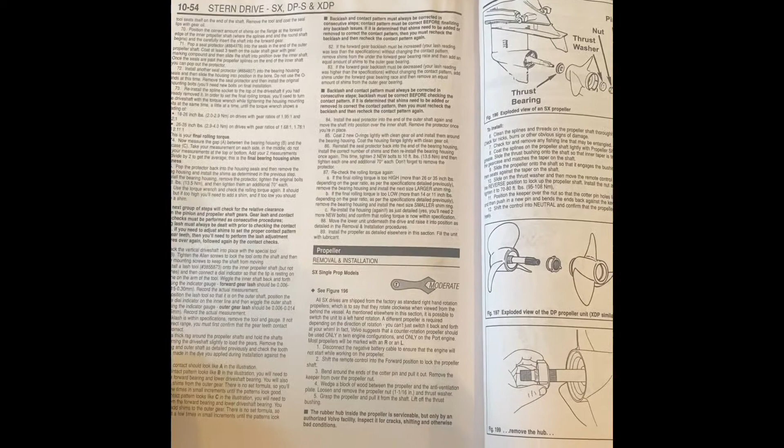I wanted to make this video to help anybody that has to replace their propeller on a Volvo Penta SX stern drive. Some key things I wanted to go over were tightening torque and the tools you'll need.

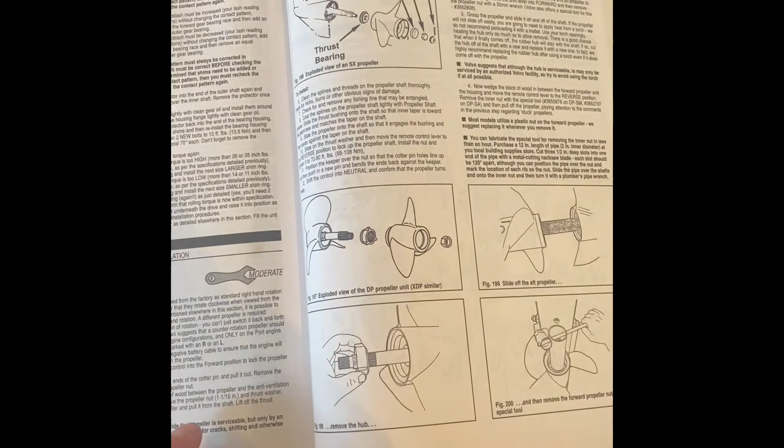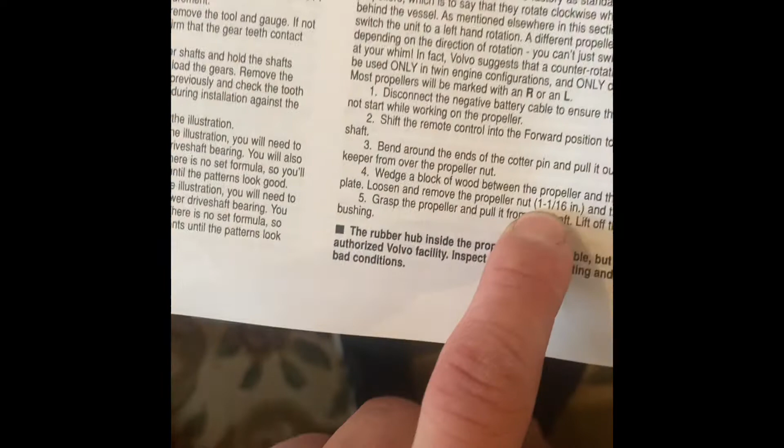You'll need a block of wood, a 1-1/16 socket, and a torque wrench. You'll need to torque it to 70 to 80 foot-pounds.

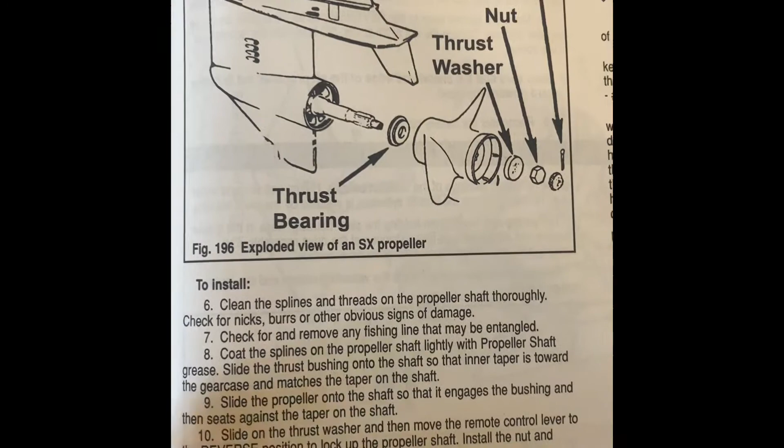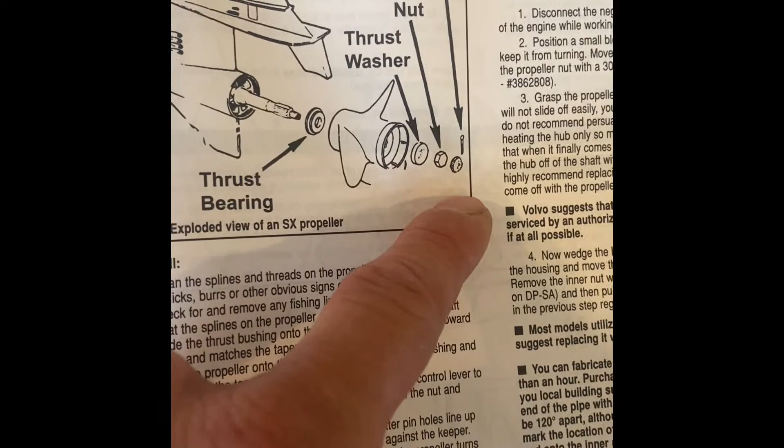This is the diagram of how it comes off and how it goes on. You see the different components: your thrust bearing, your propeller, your thrust washer, your nut, this component that the cotter pin locks in, and the cotter pin goes through the shaft.

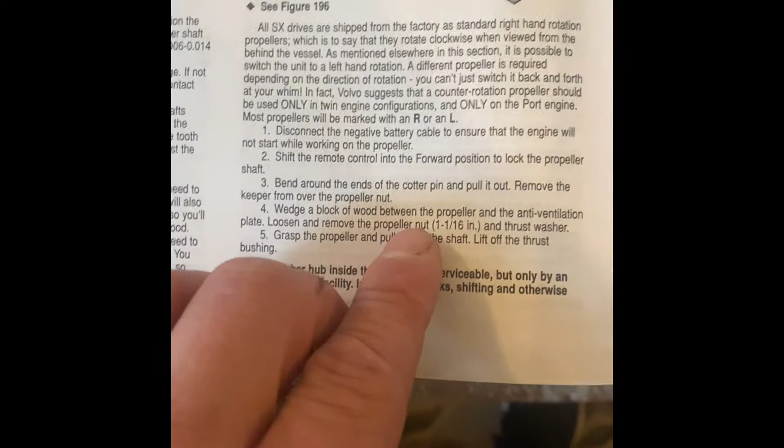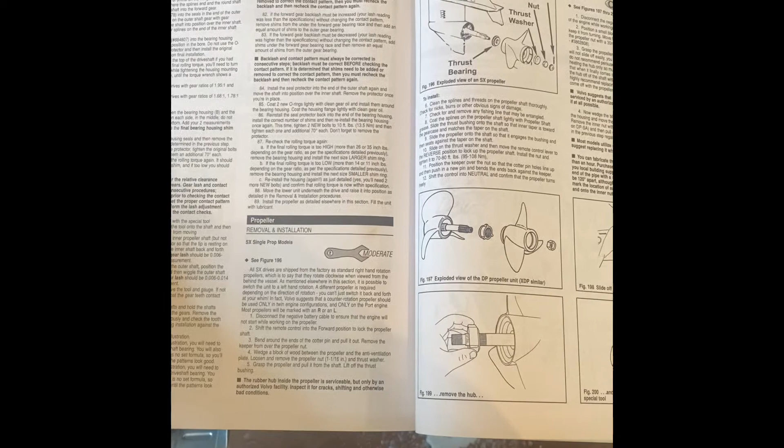Another thing to pay special attention to is you're going to need a block of wood, and you're going to need to put the boat in forward and reverse during this process. I will get into more details and specifications on this repair.

First step to this job is to apply the methods of safety and remove the negative battery terminal so the engine doesn't have any possible way of starting.

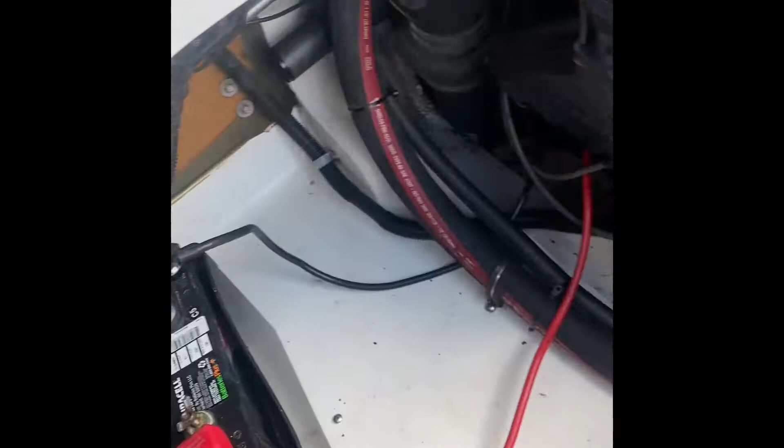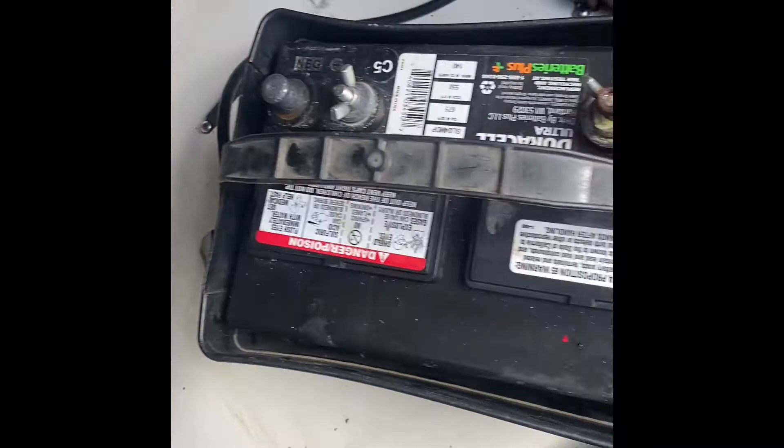Got my wrench here, I'm just going to remove it. As you can see, I have the negative terminal off the battery. Now we're safe to work on the propeller.

Sam Scheffler back here at the YouTube channel. As you can see, we did a little bit of damage out at the lake. Should have known better. I'm going to show you guys how to fix it.

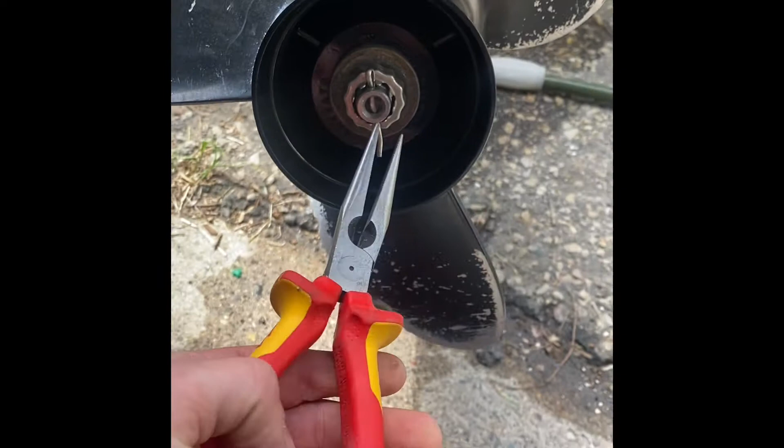First step is remove the cotter pin. Get your handy dandy needle nose pliers, bend the cotter pin straight, insert, and pull it out.

Once you have the cotter pin out, take this component - please, I couldn't find the name for this in the manual, if you guys know, please leave it in the comment section. Thank you. Next we have the nut.

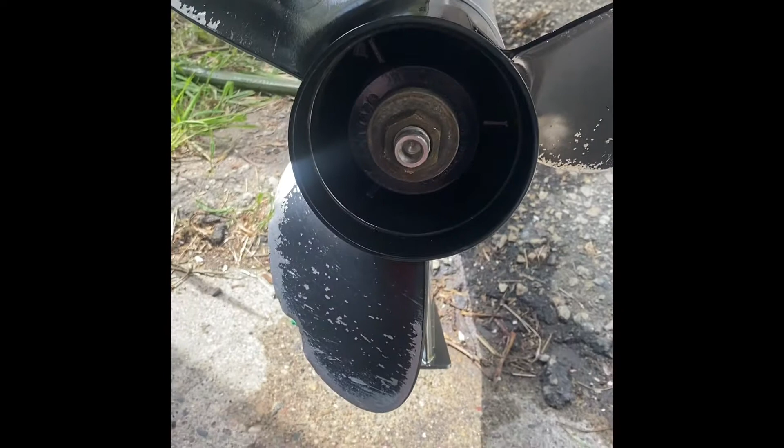So we're going to have to break that nut loose. I'll show you guys how to do that next.

Next step, shift the boat into forward.

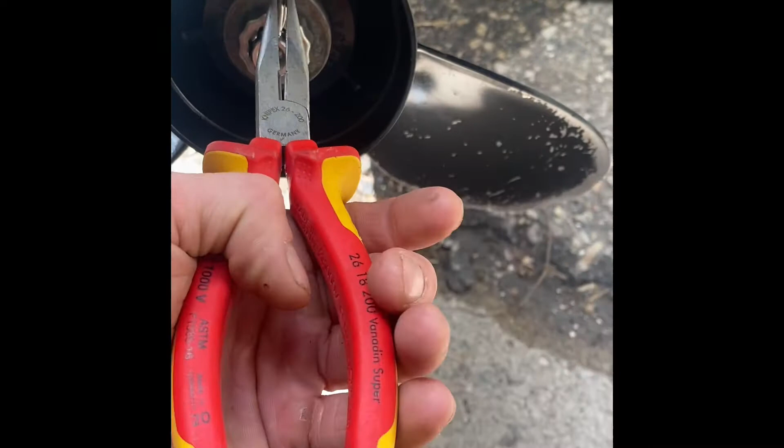Next step, remove the cotter pin and this cotter pin mechanism. If you know what this is, please leave it in the comments. Couldn't find it in the manual.

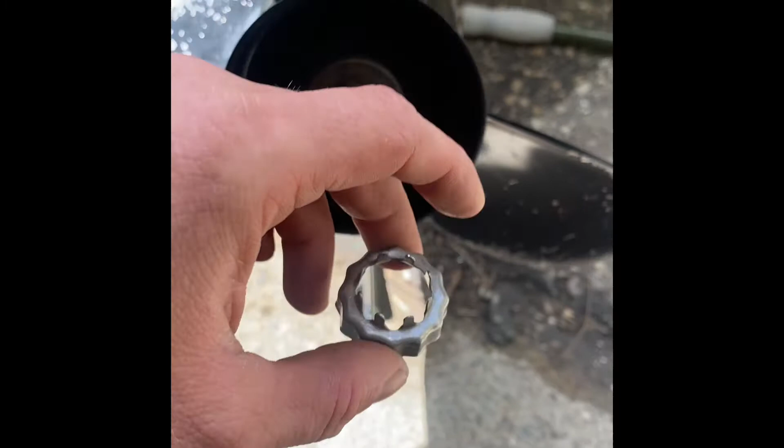The next step is to find a nice piece of wood that's soft, that won't damage anything, no nails in it, and wedge it in there. So we're going to loosen this up. I'll show you guys how.

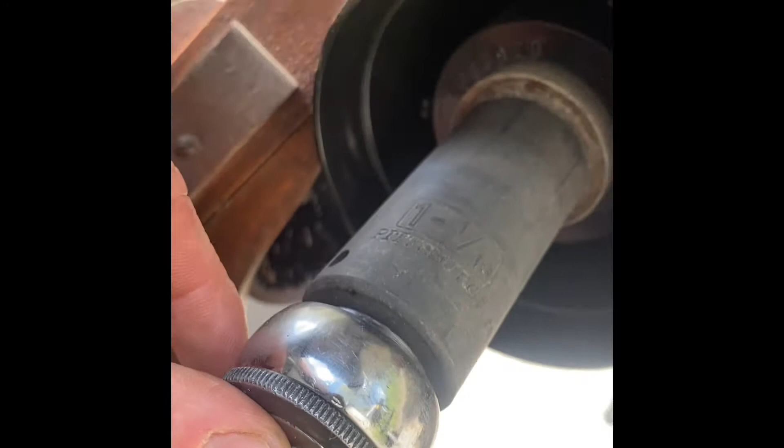Mine was super loose. It's a little alarming because I had it done at a professional marina. You need a 1-1/16 socket, just have a Harbor Freight one.

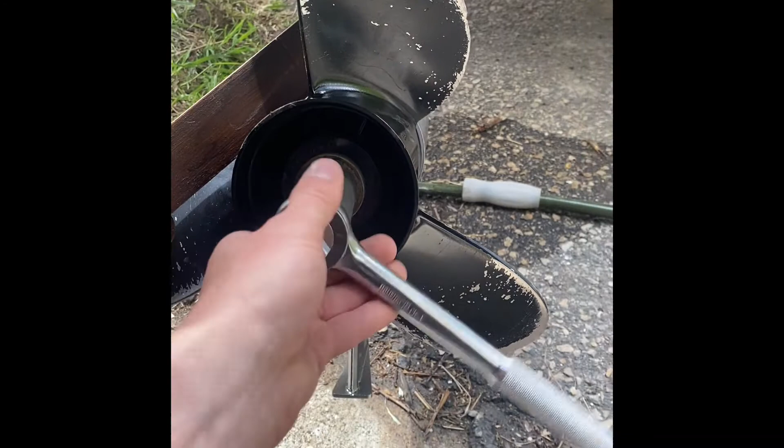That would wedge in there. I didn't even need to put that in there, it just came loose, which is not cool. So I'm going to pull this off and I'll show you guys the rest.

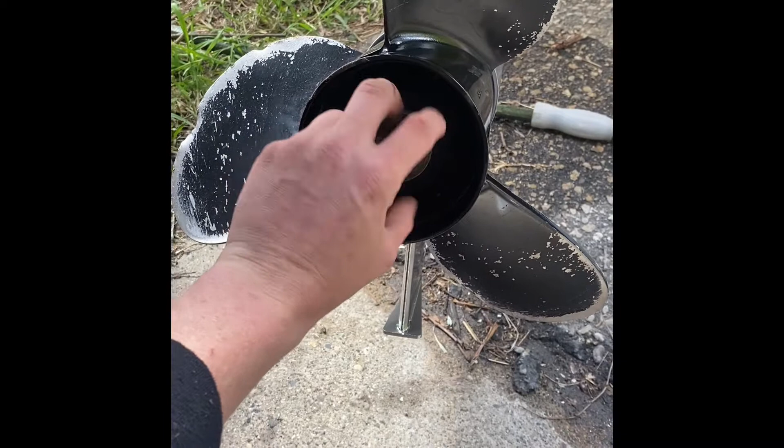I'm going to pull the nut off. Washer. Well, this is the propeller. It should just pull right off.

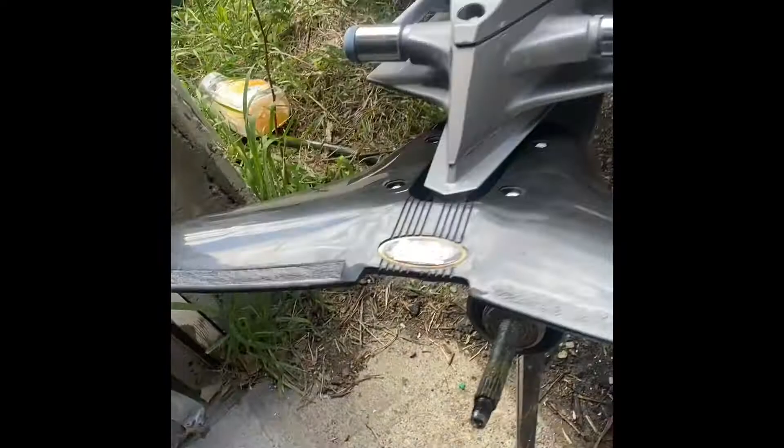And this is the thrust - oh, that's on there a little tight. The thrust bearing, as the manual says.

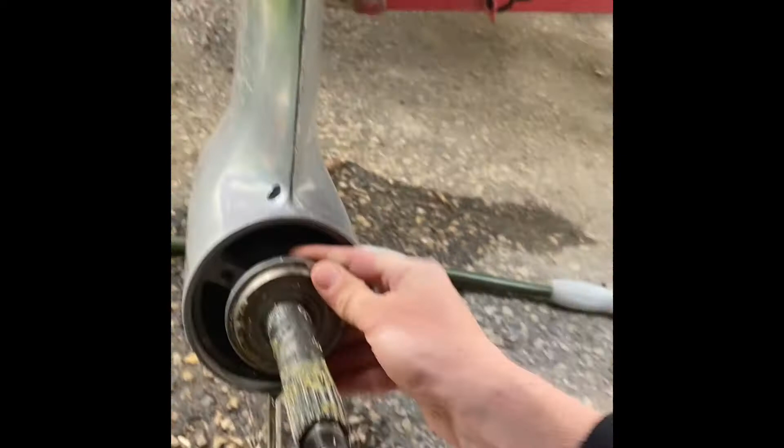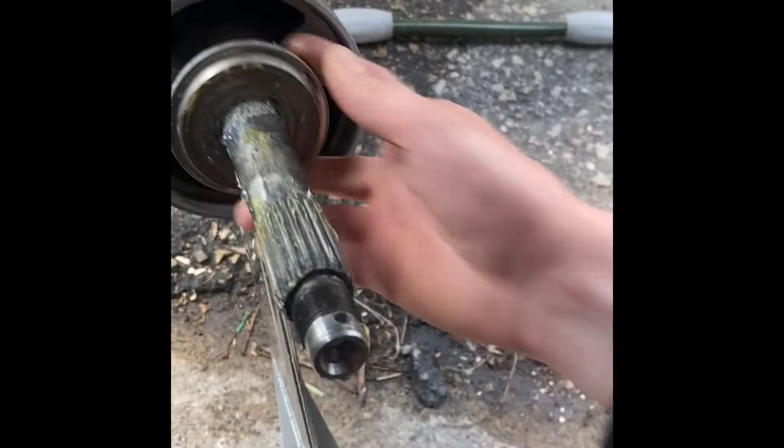I don't even know if I want to take this off, but they suggest to take this off to inspect the shaft. My shaft doesn't look too bad. I don't even know if it's worth it to get off there. I don't think I have to take it off for this exact propeller replacement, so I'm going to leave it on there, but you might need a puller of some sorts to get that off.

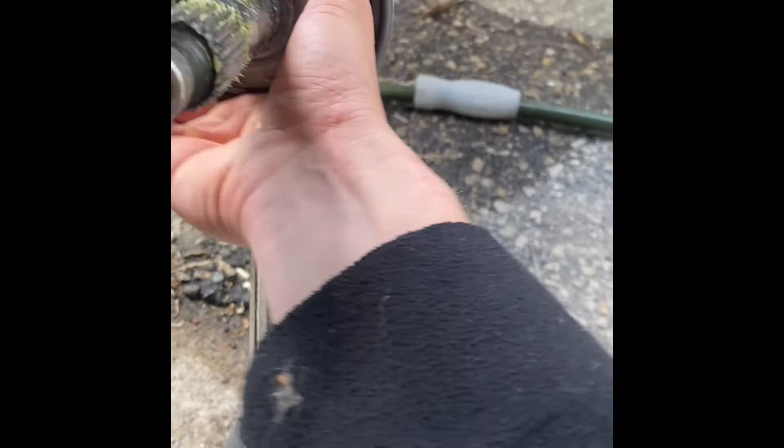Everything looks pretty aligned. My shaft doesn't look bent. You would need a dial indicator to truly tell if it's bent or not, but just visually inspecting it looks good.

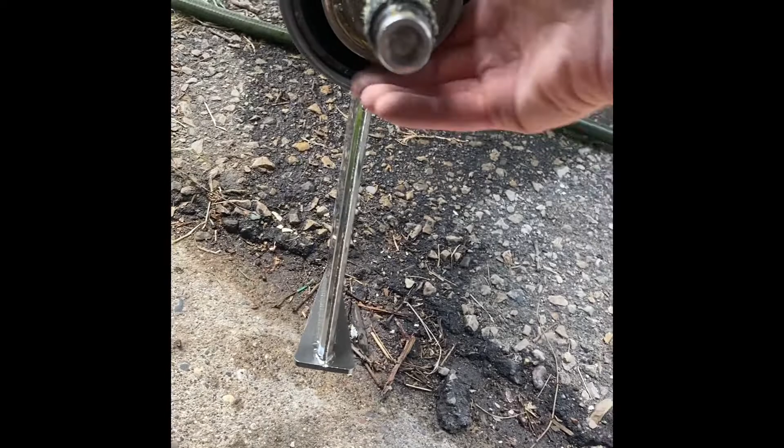So I'm gonna clean off this grease and reapply some Quicksilver high performance grease. That's what the local marina suggested, so I'm gonna use it.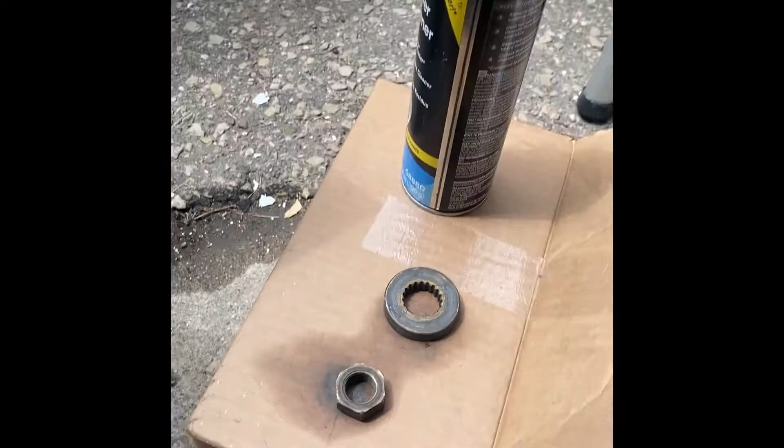All right, next step. I removed everything. I got everything cleaned up, all the old grease off of the shaft. Now I'm gonna be applying a light coating of grease and just smear that around. You don't have to have a ton, just a nice coating.

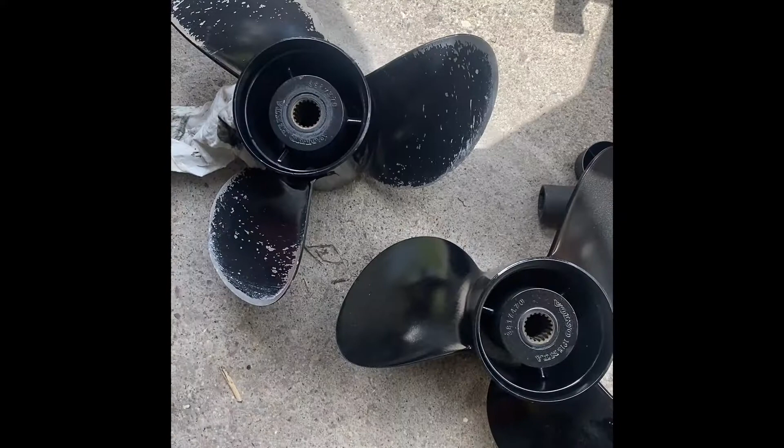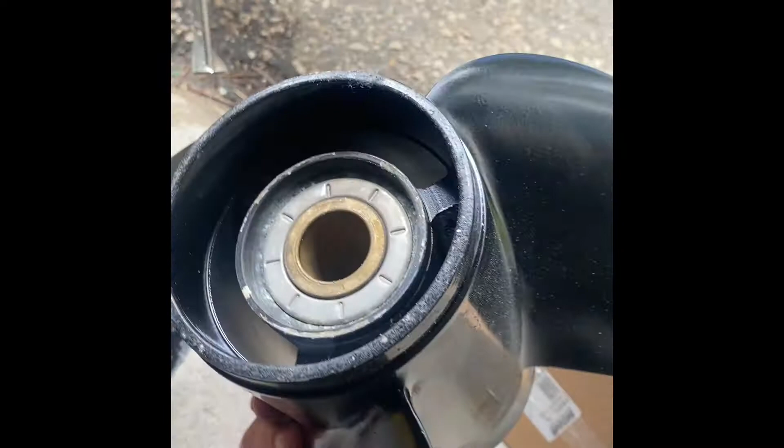Okay, now it's time to put the propeller on. Make sure to put the propeller on the same way you pulled it off. So I have the Volvo Penta facing me. As you can see on the back side, looks a little different. So we're just gonna go ahead and put this on. Slides in.

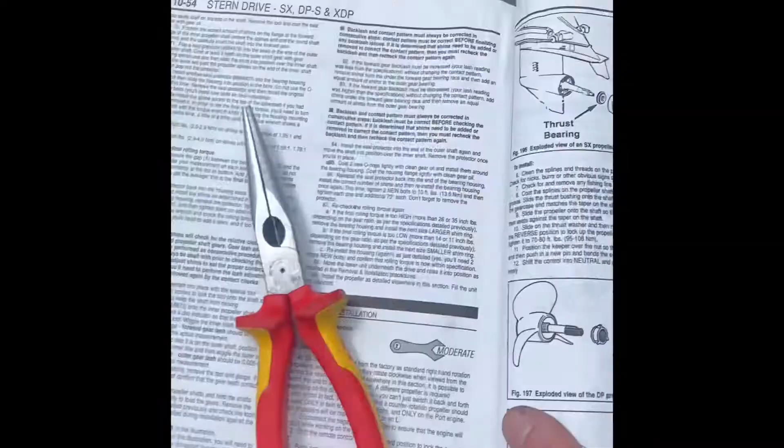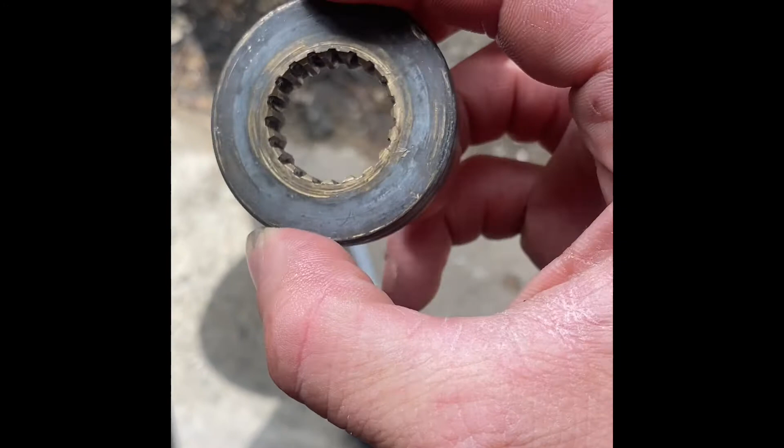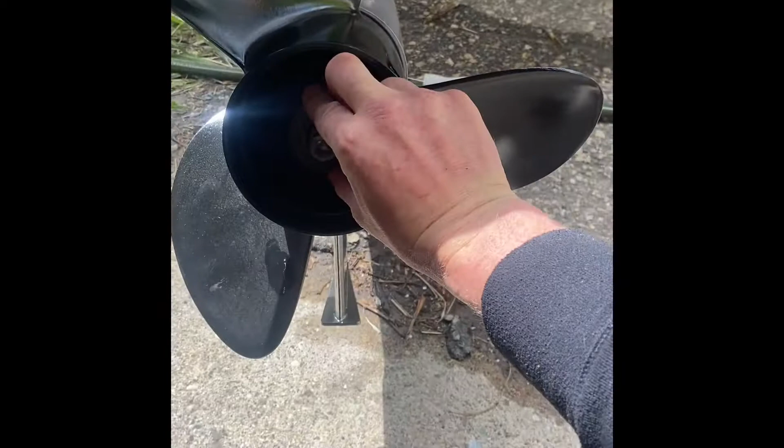Now next we're gonna put our thrust washer on and our nut. I'm not sure if this has an orientation. It looks to be identical, symmetrical. So thrust washer, make sure the splines get on there and it locks in. Nut.

Okay, now we're ready to torque, but we have to do one more thing before that. Next step, guys, we're going to put the boat in reverse.

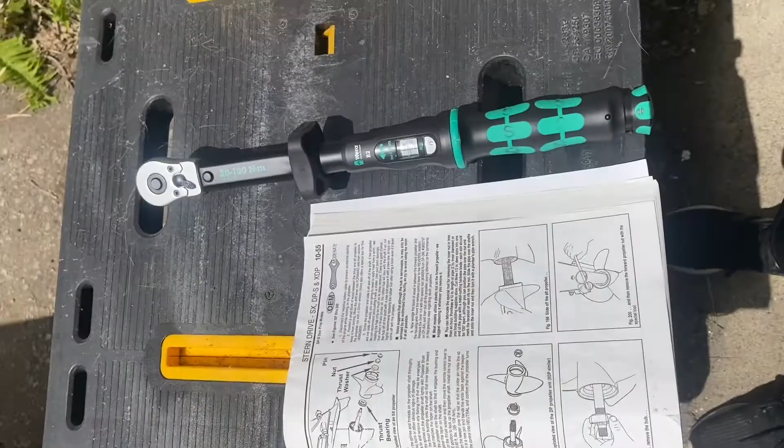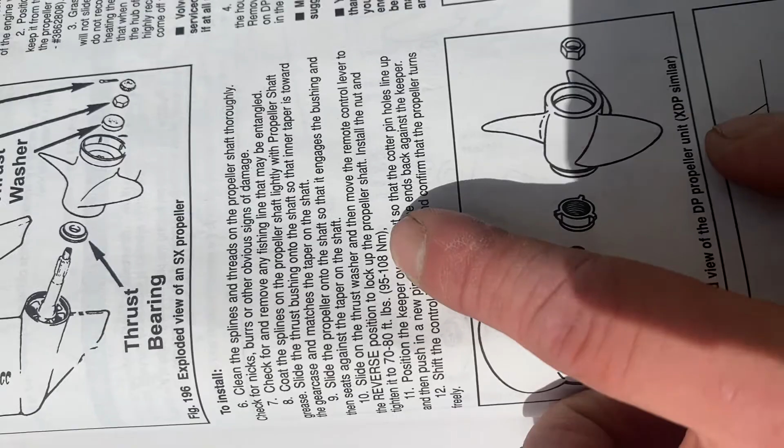All right, guys, now it's time to torque. Once I put the boat in reverse, the manual states to torque between 70 and 80 foot-pounds, or 95 and 108 newton meters. I have my torque wrench here. I really like Wera tools. Shout out to them. Be a tool rebel.

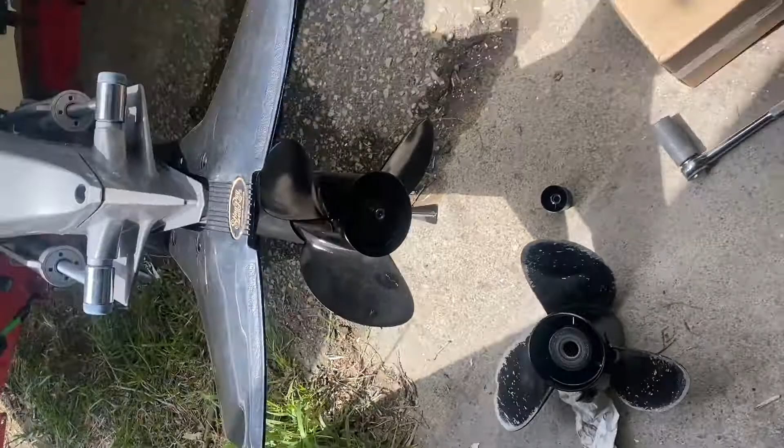And I have it set, as you can see, within that range. I always like to torque on the lower side of things, just to be careful. So I shouldn't have to put a block of wood in here as the manual states, so I'll change my socket out and torque, and I'll show you how I torque it.

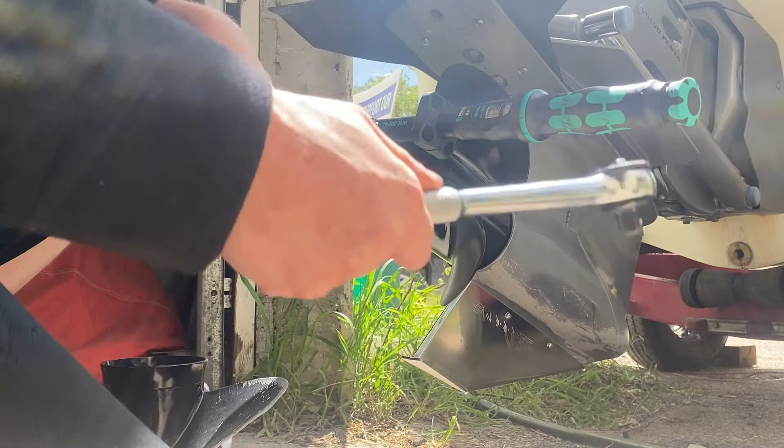All right, I got my torque wrench set up, set to the correct torque range. One thing I wanted to mention, you never want to break a nut with a torque wrench. You always want to do that with a standard ratchet. So keep one hand on the head and we'll torque.

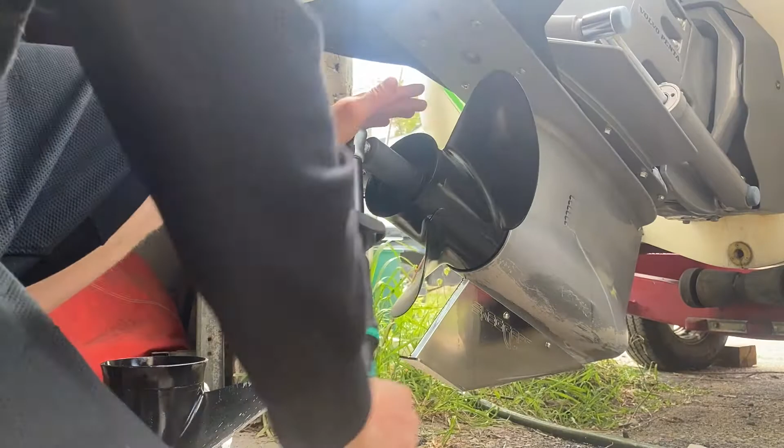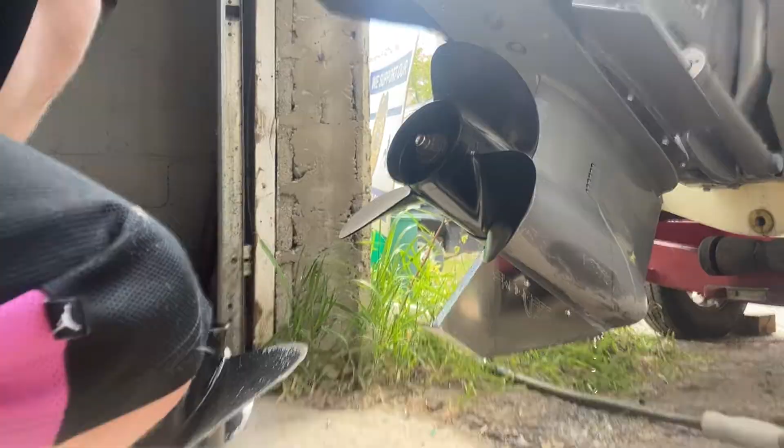Nice and smooth. Don't get jerky with a torque wrench. A little bit more. One. See, you get more out of it. 2, 3, 4. So you know that's torqued properly. Don't just torque once, torque multiple times to make sure you're on the correct setting.

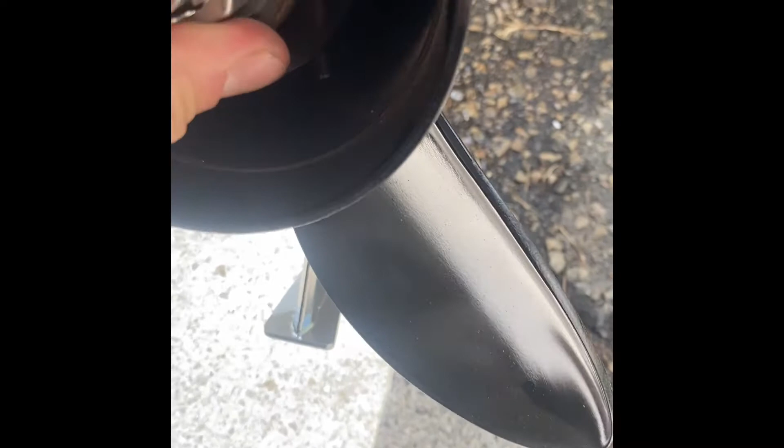All right, guys, I figured out what this component's called after reading the manual. It's called the keeper. It's obviously to keep the cotter pin in place. My keeper's a little off center. I don't know what that has to do with, but now we'll reinstall the cotter pin.

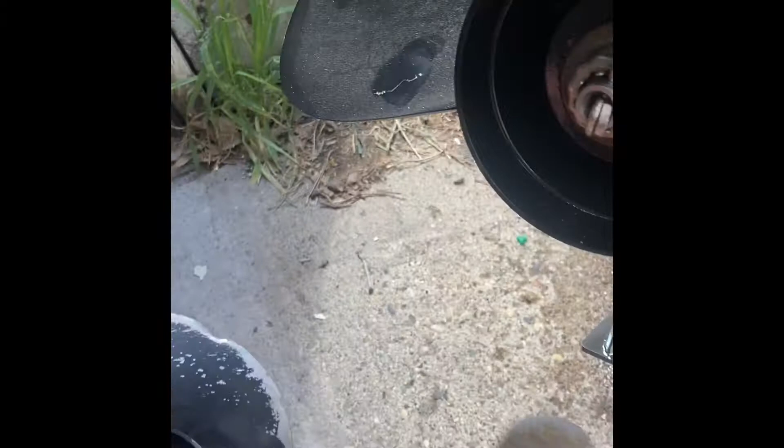All right, guys, got the cotter pin in. Another suggestion, I went and got my lineman's pliers to put a little bit more leverage on there. And also I wanted to bend that in better so it won't fall out. It's always nice to have a nice dead blow soft mallet.

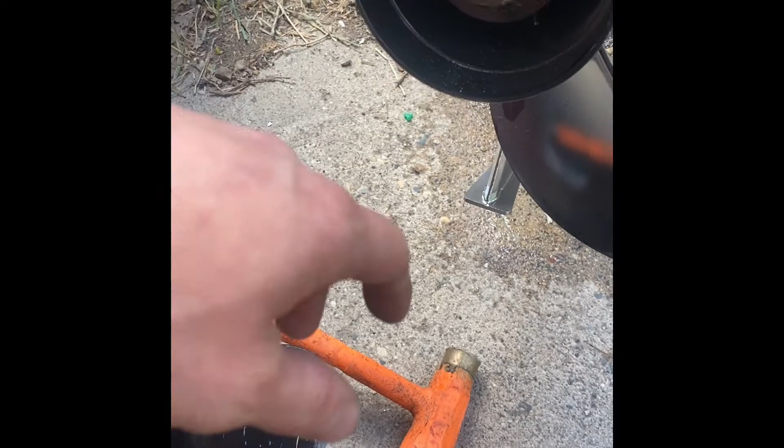Now the last step we should do is just rehook up the battery cable and we should be able to go back on the boat or take it on the water.

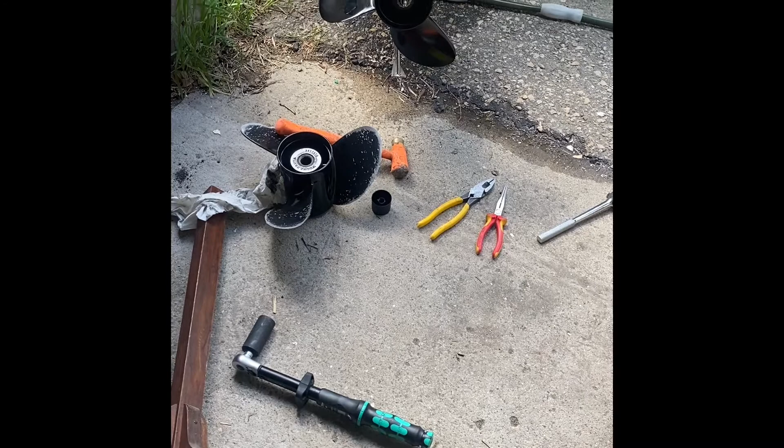So thanks for watching, guys, and hopefully this doesn't happen again. I've learned my lesson. Don't go to the shallow lakes, and I don't have a trim gauge, so I gotta fix that. So I might have to pull this whole unit off eventually here. I'm no expert, I'm no boat mechanic, but hopefully this instilled some confidence in you. Anybody can do this job, and thanks and have a wonderful day.